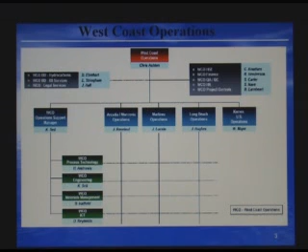So they are going to be all gone there. We have all these operations going on, and this group here, where we guys, all of us, all the engineering group falls under here. So we come under Carl Sale.

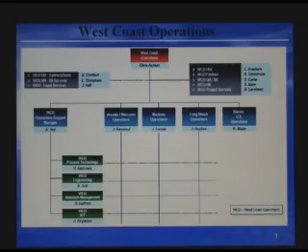We've got a process group under Helmi, and then we've got the other groups, which is procurement, and Dave Reynolds and all that. Now, we all fall, as I said, under this group, Carl Sale's group. So, where do we fit in our groups with all the engineering groups? That is the engineering department there, and we have mechanical, piping, architecture, structural, electrical, instruments, CADD, and IT.

And in the mechanical group, we have rotating. You heard from them, quite a number of them. You heard from process guys, rotating equipment. You heard from vessels, mechanical utilities, heat transfer, material applications. And today, you've got the last guy, who is the material handling guy.

Material handling, as I said, is a very specialized area. There are only very, very few people who have expertise in that. Presently, I have some help, but I'm alone for the time being. I've got Jeremy, probably you might know him. He's a young student from college, doing a summer internship, and he's helping me in developing an acquisition.

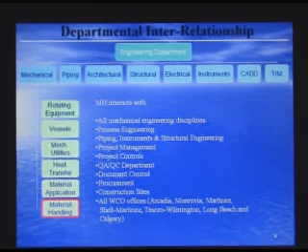I have another designer, which I'm going to recognize at the end. He's helping me part-time. But the rest of the time, we really support every project. Whatever you see there, we support everything.

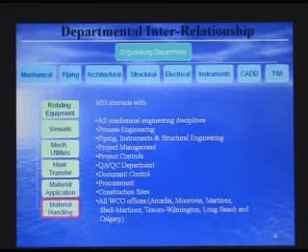So now where do we interact? We interact with all the mechanical engineering disciplines, which is all these guys. We have process engineering, we work very closely with them. We have piping, instrument, structure. I didn't mention more, but all these guys, all the engineering disciplines.

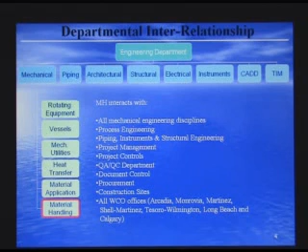We have project management, we interact with them, project controls, QA, QC, document control, procurement, construction site, all the West Coast offices, which is Arcadia, Monrovia, Martinez, Shell Martinez Refinery, Tesoro, Wilmington, it used to be Shell Wilmington, Long Beach, and Calgary.

So all these groups we have to interact with, we have to support - it's a support group basically. We support any project which happens in any of these areas, and that's where we fit in. This gives you a general idea of where we fit in and how it all works.

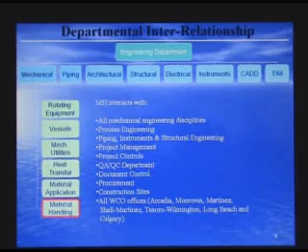Okay, now what does material handling do, and what is material handling? If you think of most of our jobs up till now, you've been listening to or working on petrochem, chemical plants, refineries. In a refinery, you heard from experienced people that if there is a pump, the pump would move liquids. If there is a compressor, the compressor moves gases and vapors.

If the pump guy, the rotating guy, cannot move it, or the compressor, which is also rotating, if they can't move any material, it comes to us. We move it. So anywhere when you hear that there is something which is not a liquid, a gas, or a vapor, and there is some handling to be done, it comes to the material handling group. We support that project. There are always little things - we'll get to that. Like the second part, I will show you some of the projects we are supporting and how we support them.

So this gives you the idea of what the material handling group does. We do the preliminary process studies, so we work with process guys, preliminary P&ID, which are P&ID guys, equipment selection - we do the selection for them. We develop all the system specs, develop equipment data sheets, write equipment requisitions, conduct TBA - this is the technical bid analysis. Write conforming rec, then review vendor documents, coordinate interdisciplinary vendor documents, construction and field support and project checkout, all the way to the closeout of a project.

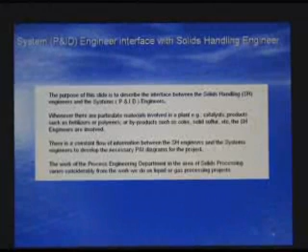Okay, I wanted to start with the basic P&ID and process group. Now, I don't know how many process guys are here, process and P&ID. I just want to get an idea of people so I know. Okay, we got quite a large turnout. How about piping? We got piping. How about structural? There you go. We got structural too. Electrical? There is one there. Instrument controls? Okay, that guy is not there.

So when I come to those slides, I will speak less. But at least it's good for you to know that we interact with them too. And of course, we've got the mechanical group, we've got rotating. I don't know whether anybody is from rotating equipment. Vessels? I think we got a number of people here, and I can recognize quite a number of you. Heat exchanger, anybody? There you go. And how about utilities? We got Victor, and Ted is there. Anyway, as we go, you will see that we'll be interacting with all of you. Every group of engineering will be interacting.

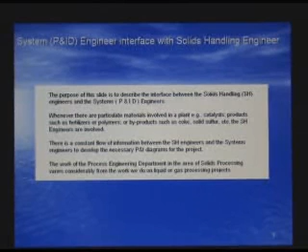The main thing, I picked this one because it is the beginning of a job. When we start a job, you always have the process people, the P&I process group. They are the first to start. Maybe they are doing a study. They're starting a process flow diagram. They're starting the P&Is. If there is any material handling involved, we interact very closely with them while they are making the P&Is, not after they have made it. So there's a lot of interface between the two.

Whenever there is any particulate material in any process, if you see a catalyst, fertilizers, polymers, byproducts such as coke, solid sulfur, etc., solid handling engineers are involved. There is a constant flow of information between us and them while they are preparing their P&Is. And the work of the process engineering department in the area of solids processing varies considerably from the work we do in the process plants which you are used to, what we normally do with refineries.

Let me give you at this point something interesting about the company. I know Victor probably mentioned to you that we are growing very fast. When Chris Aston had that presentation, the all hands meeting, he did mention that we are very heavy on refining. Which is a fact, because you see all the jobs we have, some of which we'll talk about.

Most of it is based on refining; petrochemical, we don't have much, but refining a lot. And they want to diversify the company. Because we are growing, we need to diversify more into other jobs, other types of industries, other types of projects. And what they mentioned at that time, if you remember, he said that we would go into power group, our power type of jobs. We go into minerals, which is another area we might go. And we'll go into infrastructure, which is something which old Heritage, Parsons Heritage, is doing.

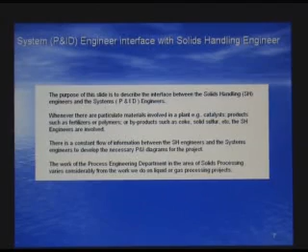Okay, another slide here which tells you about a fluid processing plant, what happens when you do a P&I. The P&I started, you buy equipment which you have all heard about up till now. There's a vessel, there's a heat exchanger, there are pumps, there are compressors, all kinds of equipment. They can make a P&I with that because we have been doing so many of them. But if there is material handling involved, they cannot do it right away. We have to follow.

In our group, the knowledge and all the experience which you will see here is so broad. It is the width of knowledge, not the depth of knowledge. So width-wise, we will cover a lot of things which are not easily available to a process engineer or a P&ID engineer. So they have to work with material handling, and we have to work with the supplier of the equipment. So we work a lot with suppliers, and we get a lot of information out of them. And once we get that info, it goes to the P&I to make the P&I ready.

So if you see, all these items are very easy. They can make a P&I. But when you go to solids processing, we depend on the information which we get from our suppliers. We can determine sizes for conveyors, bucket elevators, filters, blah, blah, blah, because they are in the catalogs. But when we buy systems and we have something like dust collectors, blenders, dryers, etc., there is a lot of information which is specific to that vendor.

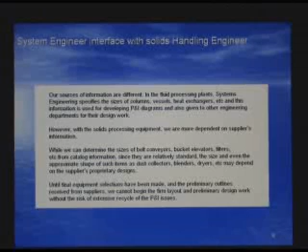Okay, it depends on the supplier; outline drawings are very important, as I said before. System engineers draw systems. When I say system, it's P&ID. This is from one of the companies where I used to work. They used to call them systems.

So sometimes I use, and bear with me with some of the slides I might show. They are very old. I had to dig into my garage and the boxes to find some slides. So some of them are very old documents which we made slides out of. So they might be a little bit poor quality, so bear with me on that. But the information is there for you to learn.

Okay, we have a close liaison with our P&I guys.

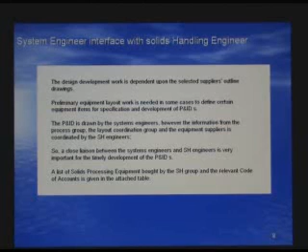Okay, then we'll go into the different code of accounts, but I will just go to the next slide. Okay, most of the complex systems which we buy, which are mentioned here, are the coke handling system and sulfur handling system. These are not one piece of equipment, they are whole systems we buy.

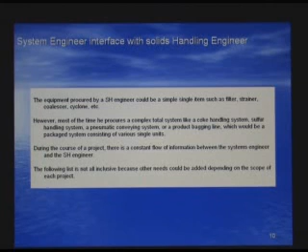And that's where, when you buy a system, you definitely come across every discipline. We work with the piping guys for the layout work, we work with the process P&I, everybody. We have electrical equipment in there, we've got controls, we've got instruments, we've got a lot of structural supports which we need. All that system has to be completely fed by all the other groups like the ones you guys are coming from. Well, let's go to the next slide.

This is the information which flows from the systems engineer, which is the P&I engineer, to the solids handling engineering group. With all the operating conditions, they know exactly what the operating pressures, temperatures, rates, viscosity are, also the design conditions, the pressure, temperature, all code requirements, the dust loading.

I mentioned to you our biggest enemy in material handling is dust. Every time there is material handling, there is dust somewhere. And we want to be sure that that doesn't become an environmental hazard, so we always have to handle that. And the stream, pressure drop, blah, blah, blah, physical properties of solid particles. Now you might hear some of these words, but I'll just tell you.

Particle size, because for every solid particle, the design depends on the size of the particles. Then we've got size distribution, bulk density, specific gravity, moisture content in the particles, angle of repose. This is a very interesting one. I'm going to touch on it when we go to some pictures. And the hardness of the solids which we handle. All this information usually flows from the process engineer to the system engineer to the solids handling engineer.

Other data we get from them, which is particularly important for the P&I guys, is the insulation requirements. In case we are handling some material at high temperature, which will come up in one of the projects, we have to be sure that we know all the insulation requirements, and that goes onto our P&I.

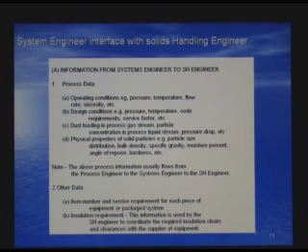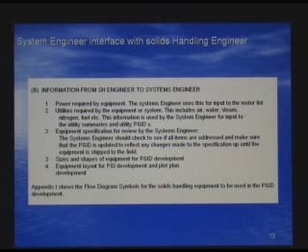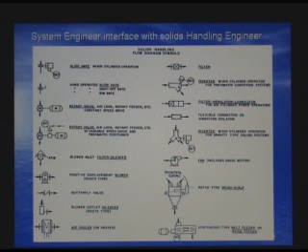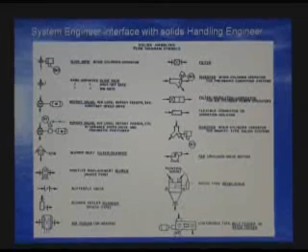Okay, we talked about equipment layout, and this all depends on the plot plan. These are more for the P&I guys and process guys, and of course all of us. When we see a P&I, we normally don't see too many of these, but just to give you a quick flavor, the flow diagram symbols are like here. If you see something like that, that's a slide gate valve which stops the flow of solids. This is a hand slide gate. This is the gate operated by cylinder operators, so there could be either air or liquid here.

This is a rotary valve, which is a sealer for the process. This part upstream is the process pressure side. Downstream is the environmental outside, or it could be a downstream equipment which is low pressure. Then we've got all these other equipment, so I won't bore you with this, but this is all in my slideshow there, so you can see it.

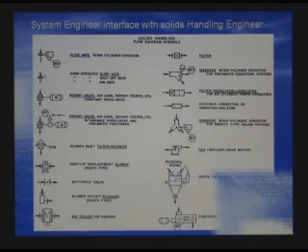Okay, the commodity codes I'm going to talk about now, we can flip that because these account numbers which I've shown there are not used by our company. It is from company X which I worked for, but basically it gives you the different flavor of what we have. In one of their accounts, which says solid transporting equipment, where you want to transport solids, the most important thing which you probably know about is belt conveyors. We have bucket elevators.

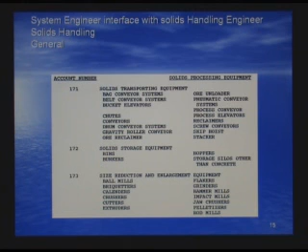This is where we actually go up and then you drop down because you're using gravity afterwards. These are chutes, and what angle you have your chute at is very important for the piping people. Then we have something interesting here you might remember, pneumatic conveying system. I'm going to touch a little bit more on this because many places we have powders, and I'll come to that when we come to those areas, since we are supporting a company called Criterion Catalyst.

All the refineries use catalysts. To make the catalyst, we have powders in it, and we have to handle the powders, and that's where your pneumatic system, which is driven by air, works. The whole system moves from A to B by a pneumatic system. And we'll talk about that.

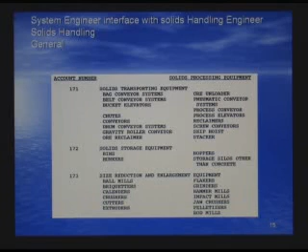Unit 172 code, which says storage. So once you handle them, then you have to store it. We store liquids, of course, in tanks and tank farms. Here we have giant silos, big hoppers, all kinds of things, which we'll look at in some pictures very shortly. Then we have size reduction and enlargement. Most of the size reduction equipment you see here is not used by us in the chemical industry, but it goes into mining. So when we go into minerals projects, hopefully eventually, we'll be seeing all this equipment there too.

And you go to the next codes. We have solids drying equipment because there is always some drying to be done in the solids. And there is weighing and packaging. You go to a Home Depot and you want to buy 25 pounds of fertilizer for your garden, and you get exactly 25 pounds in a bag. How does it happen? We have a complete system of weighing and packaging equipment which comes into the picture, and that's how you move that from the store into your car to the house.

It is all solids handling. You are handling solids somehow, and it has to be packaged, and this is where this type of equipment comes into the picture. Then there is separation of different kinds of solids. We have solids which are very heavy, which are lighter. The dust is lighter than the other particles, so we have to separate them out, and that's where this kind of equipment comes in. We have classifiers, we've got filters, and the most interesting one here, I think, is the centrifuge type of classifiers.

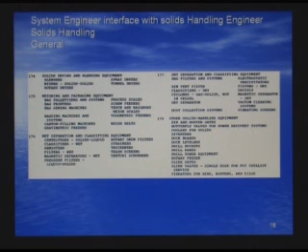Then we have dry separation and classifying equipment. We have got a number of things, the filters there, the bin vent filter. Now all these things are very alien to you, but I'll show you the pictures very shortly, and then it will all start gelling in. And then other solid handling equipment we'll talk about, and you'll see a lot of this equipment which I'll show you.

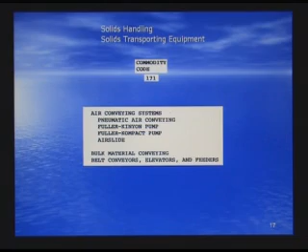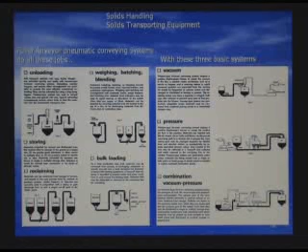Okay, the first code we saw was solids transporting equipment, and in there we have the air conveying system, which is a pneumatic air conveying system, and bulk material conveying. So let's see. When you talk of pneumatic conveying, a number of things happen here. We could move material from A to B in so many different ways, but the basic systems are a vacuum system, a pressure system, or a combination of vacuum and pressure. We always use one of those.

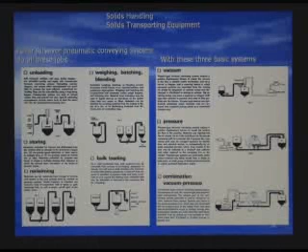And what happens here is you take a rail car, this is a railroad car, or a truck. You want to take the material from there, you go up to the receiver here, and this is where our culprit, our